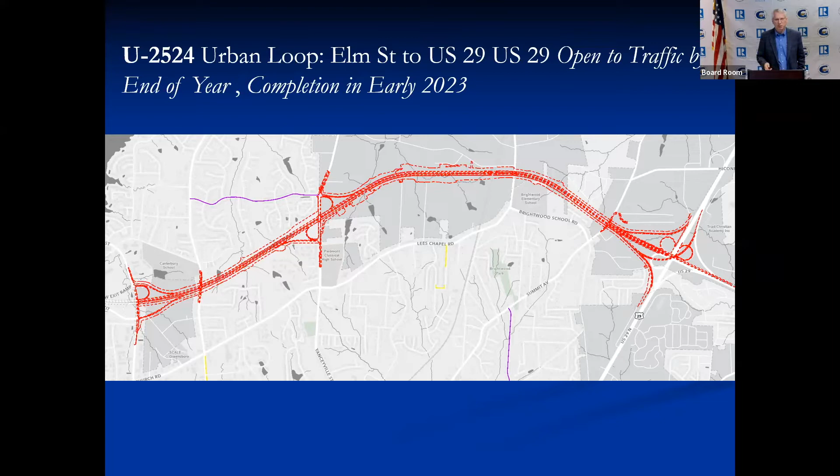Battleground Avenue, U-5892, this is a widening from where we just completed our project at the intersection of Battleground and West Ridge. It picks up there at the new signal that we put in to the shopping center and goes north up to the first ramp to the Urban Loop. This project has been through some public involvement. There may be some more in future before they go to right-of-way. And right now, right-of-way is scheduled for 2024.

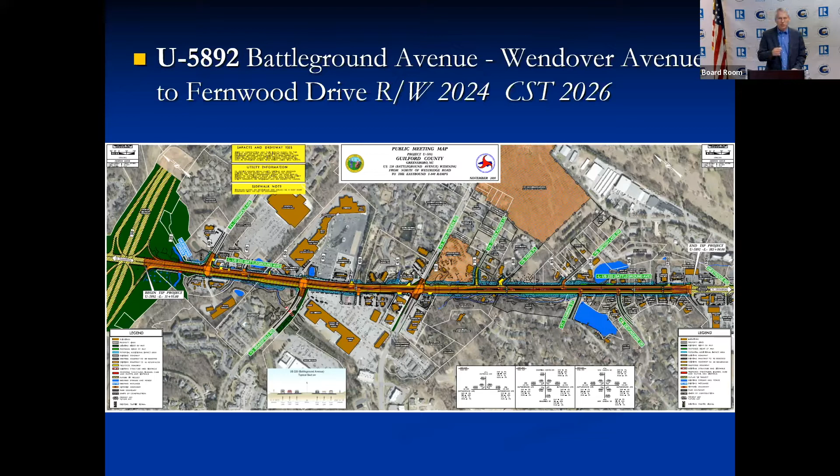But you can see here, this is one of the examples I mentioned earlier. Right-of-way is in '24, but construction is in '26. But since the right-of-way is in '24, it is a committed project.

Construction of R-4707, this is the interchange at US 29. They are working now. I drove through it on my way here today. Right now they're working in the median to set up the center piers for the new bridge that will be constructed. So construction of this project is scheduled to go through 2025.

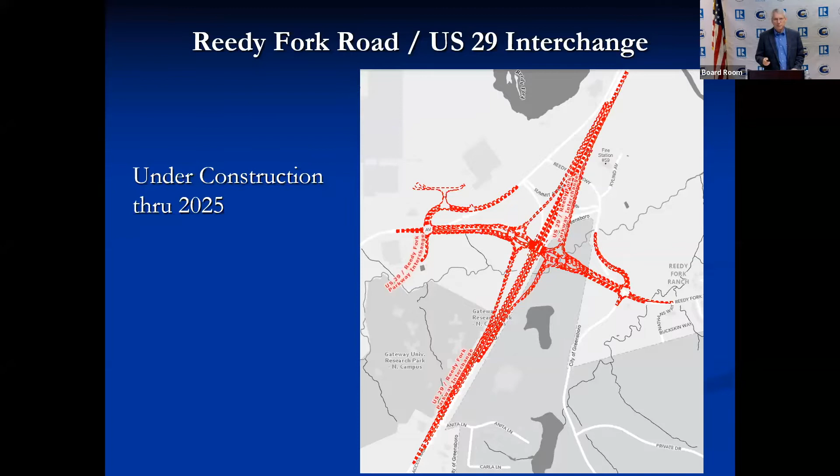I-5712, this is Sandy Ridge Road at I-40. This is some minor work to the ramps, but it'll be a widening of the existing bridge. The bridge is not that old, so they decided they can widen it. They're going to widen the bridge and then widen the roadway up to about Cider Road.

This will be a 4-lane divided with bike lanes and sidewalks, and this will tie into south of 40 with the Johnson Street project in High Point. And I do not have the schedule for that one, but I do believe it also contains sidewalks and bike lanes and a 4-lane divided facility.

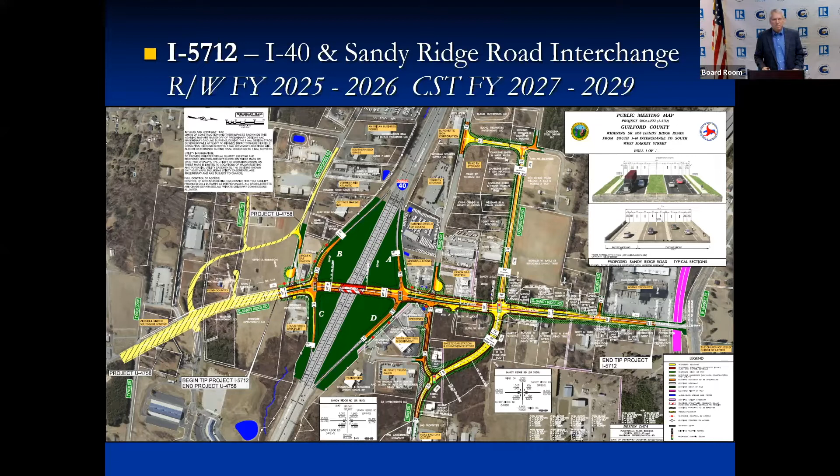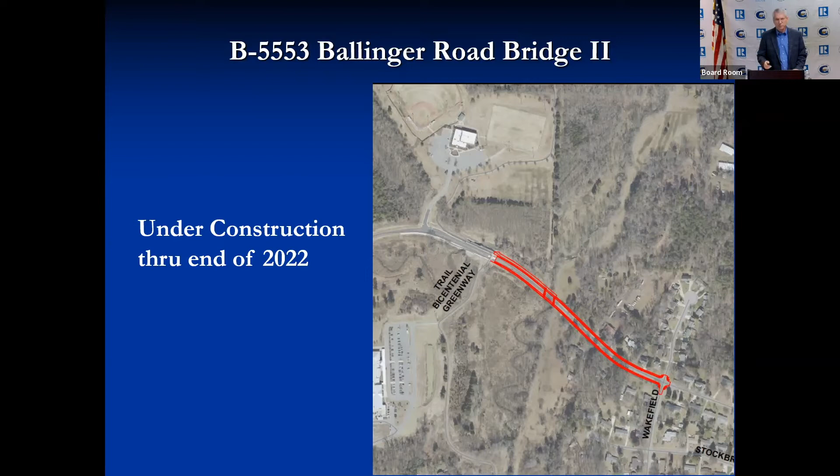Ballinger Road Bridge, this would be the second bridge that we have constructed on Ballinger Road. The first one is right close to the Leonard Recreation Center. This is a smaller bridge over a tributary to the Horsepen Creek. It's under construction. There have been some delays, but I spoke with the project manager yesterday and they're intending to have this bridge completed by the end of the year. Yeah, I got that right, 2022, okay. These are other projects that are committed.

R-5725, this is NC 68 at NC 150 and down to Fogelman Road. This is the project in Oak Ridge where originally they were going to do a roundabout at 150, and then NCDOT changed their mind, but they are making some other improvements on the roadway and I think some associated roundabouts on 150 west of NC 68. But this is in right-of-way this year. If it hasn't started, it'd be starting soon, and then construction starting in '23. Excuse me. U-6127.

This is sort of a sister project to the previous one. This is also work on NC 68. This is going from Fogelman Road down to Alcorn Road. This is an access management improvement. What that means is trying to manage the turning movements at certain points along the roadway.

I have not seen the concept plans. I do not know what all is entailed, but it's still probably a year or two out before we'll see it. But right-of-way for this project is in '25 and then construction in '27.

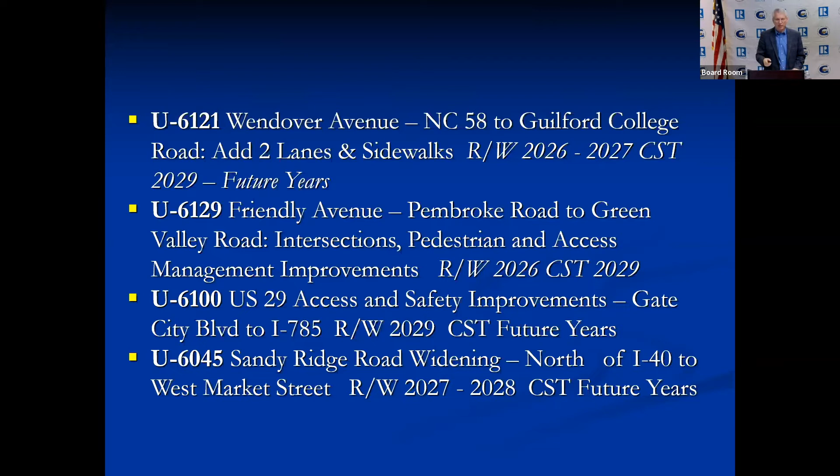U-6045, this is Sandy Ridge Road. This picks up where I-5712 stopped, basically north of I-40 to Market Street. We now know what they're planning to do is to go over Market Street and do a sort of quasi interchange, and then set up for future extension, which we now have envisioned would go north a little bit and then turn east and intersect Pleasant Ridge Road. But that's another future project. This one will just be up to and across Market Street and stop.

U-6108, Battleground Avenue between Wendover and Fernwood, and also includes Westover. Now, I've been with the city 36 years. Before I came to the city, there were people already working on ideas of how to fix this area with the Battleground Lawndale crossovers and the intersection with Cornwallis and then the intersection with Green Valley, and how to make all that work in a more reasonable fashion.

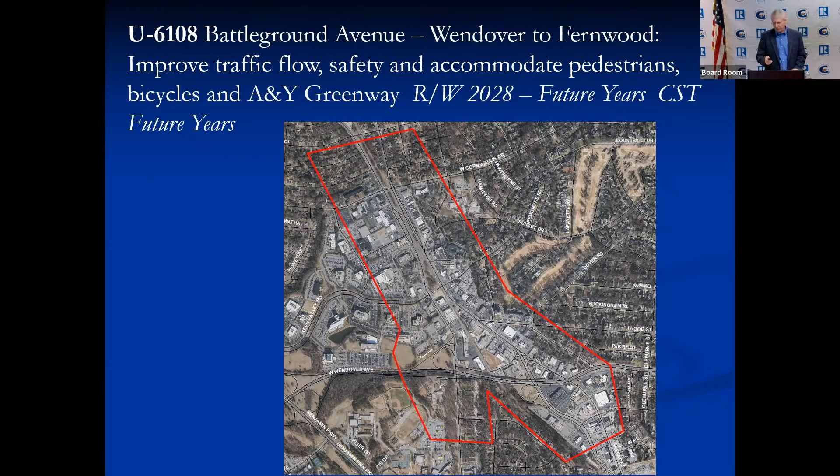And also throwing into the mix with this project, we would probably have already built the A&Y Greenway through this area, but where it will be crossing roadways, they will be tunneling under so that the Greenway can proceed through the area unimpeded. But this is a future project. And then R-2577, Section C in Stokesdale. This is still an unfunded project and we don't know when it's going to get funded.

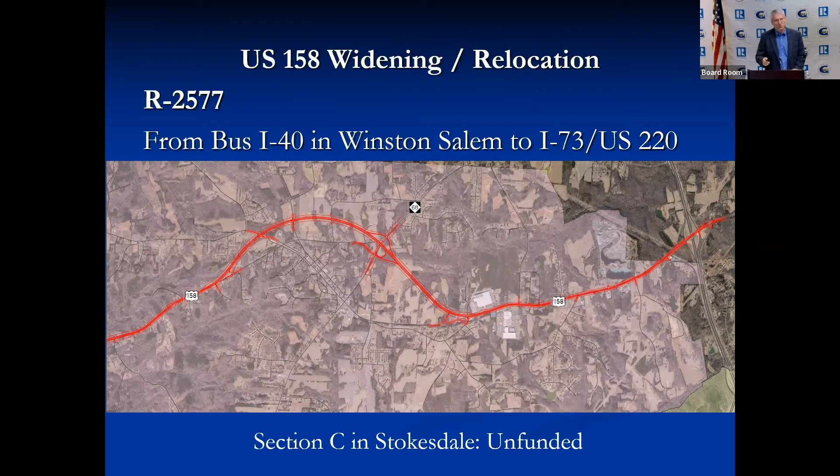Now, some committed rail projects. On the east side of Greensboro, the project that should very soon be going to right-of-way and then construction in '24 to grade separate Franklin Boulevard with the railroad. This will take Franklin Boulevard under, and then there'll be some reworking of Burlington Road and Bessemer Avenue. We're looking to take East Market Street and run it up Huffine Mill Road to Wendover Avenue. So a lot of changes in that area. This is a project that we have a lot of community support on, though during construction the roadway will probably be primarily shut down for 2 years, maybe a little longer.

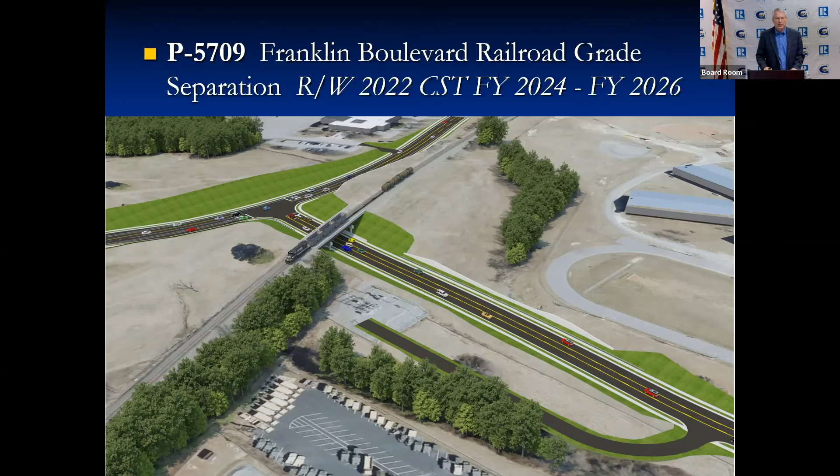On the west side of Greensboro, on Hilltop Road and the railroad, there's going to be another grade separation project. This will take Hilltop Road over the railroad. It'll also be widening to accommodate bicycle lanes, and it will include sidewalks. And I should go back to Franklin Boulevard. That project too will contain bike lanes and sidewalks. So on this project, the idea is to build the bridge to the south of the current at-grade crossing. Right-of-way starting in '23 for that.

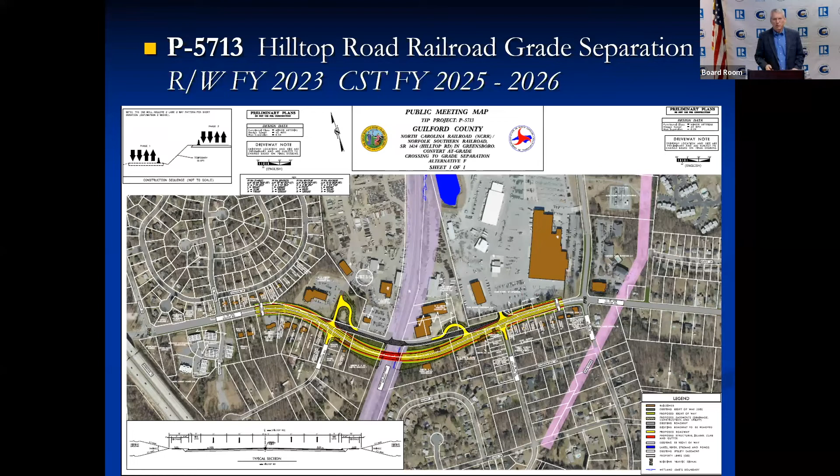Back to the east side of Greensboro, this is a realignment of Lowdermilk Street and Sykes Avenue, with a future closure of the Pine Street rail crossing. This is a project that came out of the same planning document as the Franklin Boulevard grade separation. And this is to remove a redundant crossing, which is Pine Street, once Lowdermilk has been realigned with Sykes Avenue, and we're anticipating this project will include a traffic signal. Also, there will be sidewalks included in this project as well.

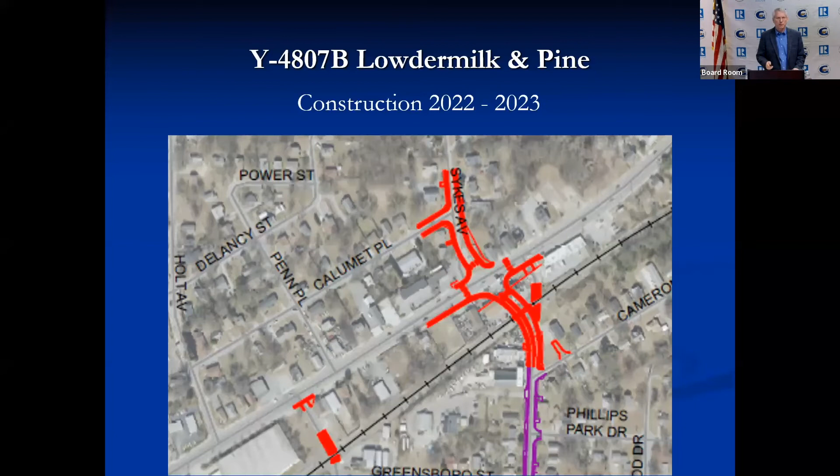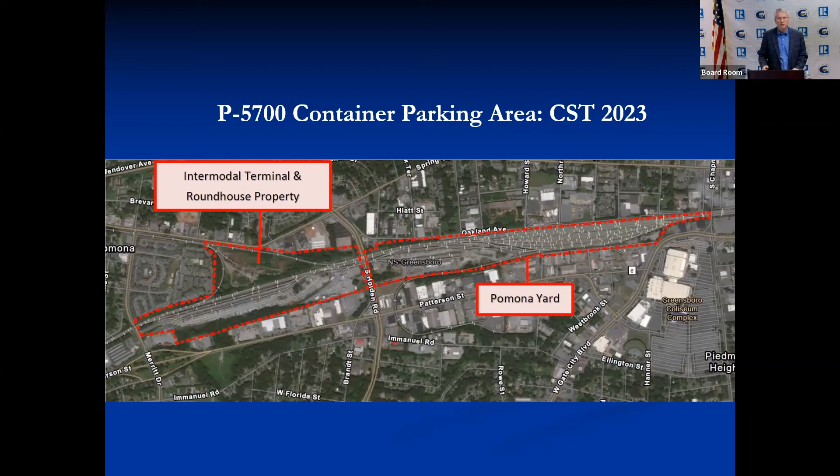Out at the Pomona rail yard, the MPO recently did an action to move some funding. Originally, on the north side of the tracks, between the tracks and Spring Garden Street, there's an empty piece of property. It used to be a roundhouse there many years ago, and what Norfolk Southern wants to do is convert that area into additional parking for shipping containers. Originally they were looking at starting their project in '22, but we recently did action to move the construction out to 2023.

Two more rail projects. P5735 is building a grade separation for Gansford Street over the railroad. This will be north of Rankin Road. We have not seen any drawings on it yet, but they're showing right-of-way in '25. This project could slip into the uncommitted if they don't provide us with some design information.

And same with English Street. This is English Street, just south of Market Street, to grade separate that crossing. And that crossing would probably have some impacts to Market Street.

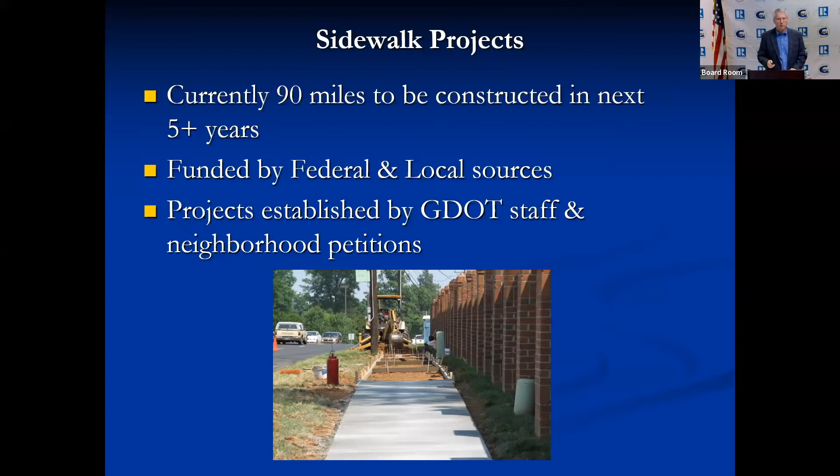Now, we're still building the sidewalks. We're trying to accommodate all users. We're also going to be soon looking at, along with our sidewalk projects, improving access for transit users. We're looking at the stops they currently have and the higher usage stops, with 10 or more riders per day. We're planning on providing shelters. So that's an upcoming project we're working on, to provide shelters along our sidewalk system.

The downtown Greenway is getting closer to being fully complete. Thursday, March 10th, I believe it is, the city is planning to open bids on phase 4. This is a section from Spring Garden Street up to Smith Street, and it also contains a small section of A&Y Greenway from Smith Street up to across Benjamin Parkway. Again, we're looking forward to a bid opening on March 10th.

Now, the rest of the Greenway is complete except one little section on Murrow Boulevard. During construction of the Greenway along Murrow Boulevard, we discovered that the bridge deck on the bridge over Church Street is in terrible condition and needs to be replaced. So we're in the process of getting everything lined up so we can get a contract out for bid on that deck replacement. During construction, we'll be working with the downtown Greenway technical team to work out a suitable detour, because we do not need people walking through a construction site.

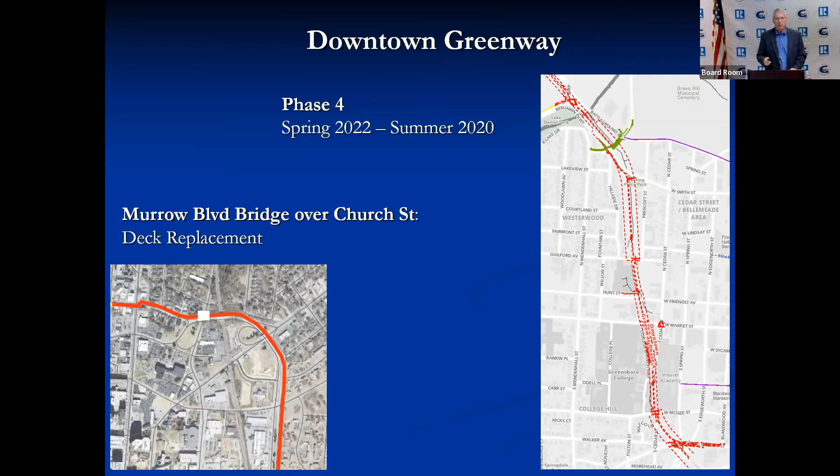Greensboro projects. Horsepen Creek Road, which we had hoped would be completed by now, had additional utility conflicts that took a while to resolve on the northern end, I believe between Carlson Dairy and Battleground Avenue. What I've been told, those conflicts have been taken care of, and now they're working on the widening and looking for completion of the Horsepen Creek Road project this coming spring.

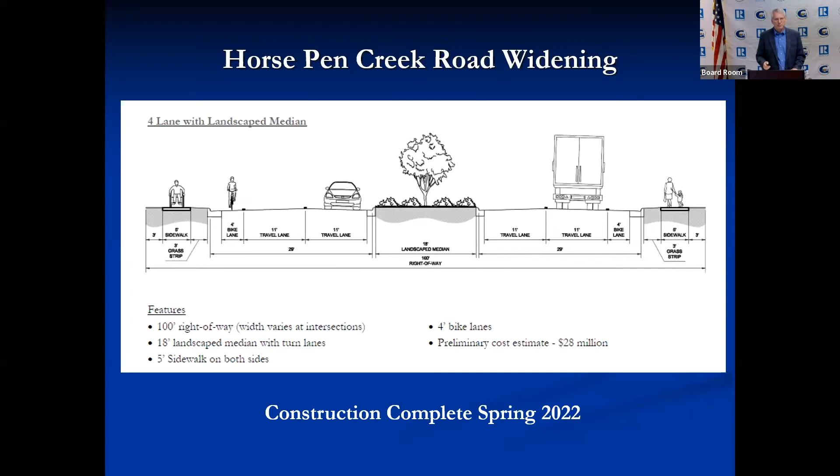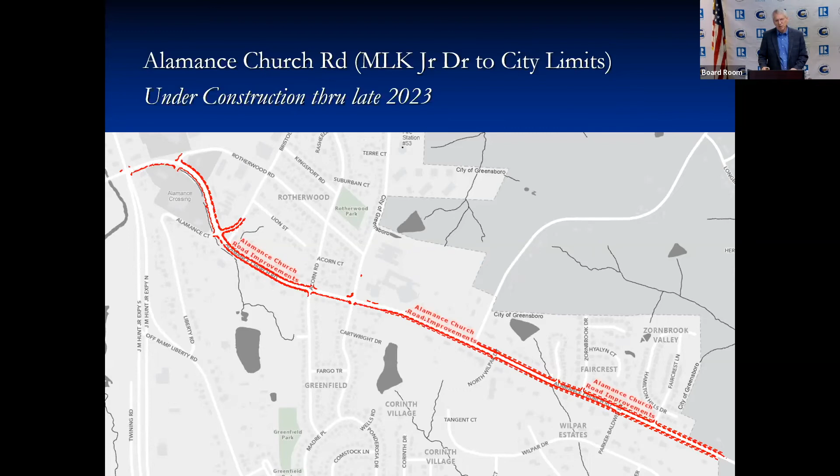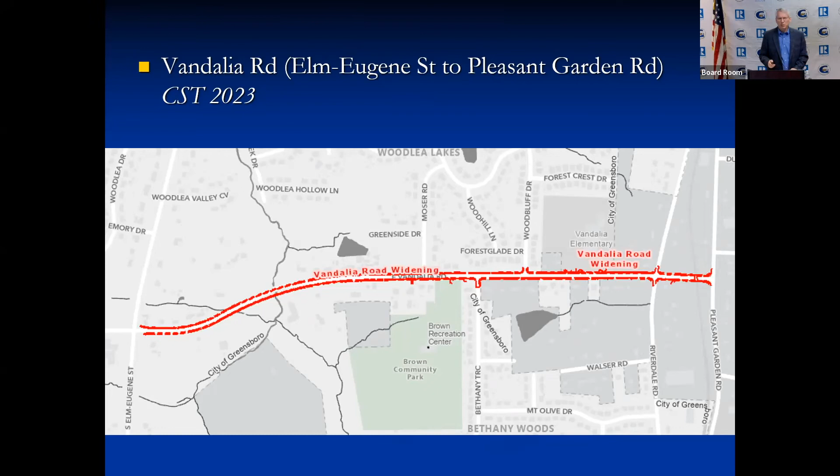Now, earlier you had a safety message. What the city has been doing, this started before the pandemic, was roll out what we're calling Vision Zero. This is a program that brings various stakeholders together to work out the engineering, education and enforcement, all the 3 E's needed to reduce the injuries and fatalities on our transportation system. So be looking out for another, wouldn't be a kickoff, but later this year they're going to bring this out again and do another big advertisement push to help get the message out.

And yes, because we already completed the primary phases, and now we're in phase 2 or phase 3, this is the only element of our action plan that's being developed, and then getting word out to everybody. Now, the information that's available to you all, hopefully some of you have been using the road project mapping tool. I add projects to this as the project design information becomes available. So some of the projects that we've seen that are upcoming, I haven't gotten the CAD files to those yet, but once I do, I update that.

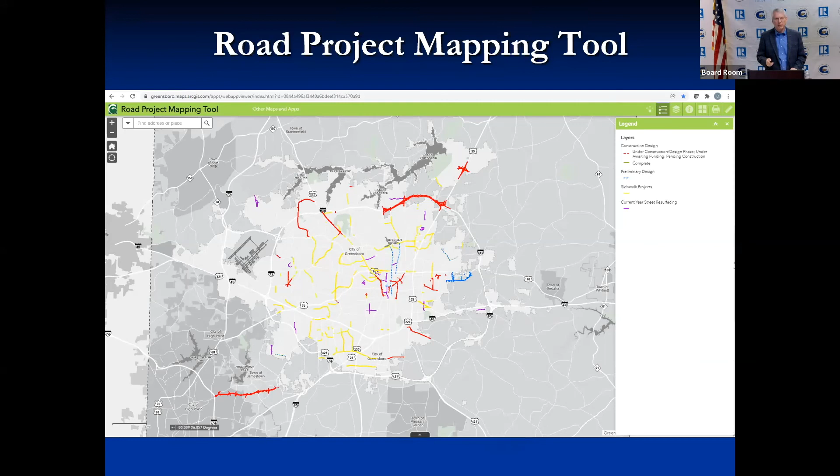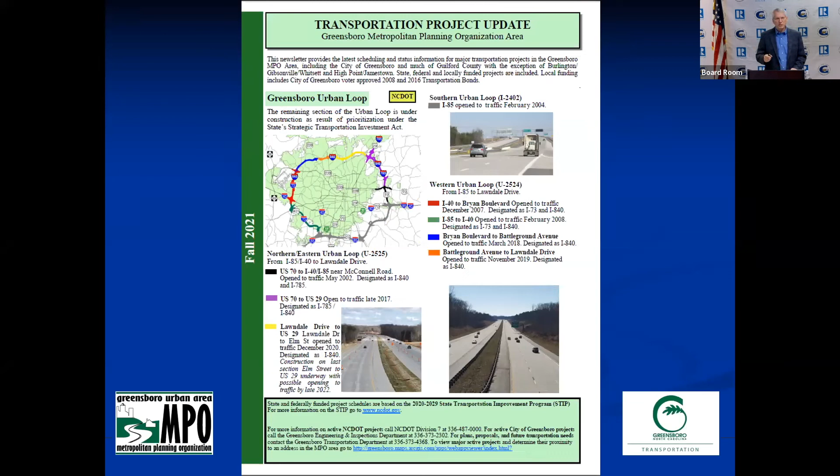Many of you now have our latest edition of our Transportation Project Update newsletter. Now, some of the funding, as I talked about earlier, we've done some recent action, delayed a few projects, but all in all, this is still fairly up to date. And the City of Greensboro has been working on reconstituting their website. Some pages have changed, some documents you may have looked for in the past are not there. I had a web link that didn't work. So what they've created, and man, I wish I made notes now.